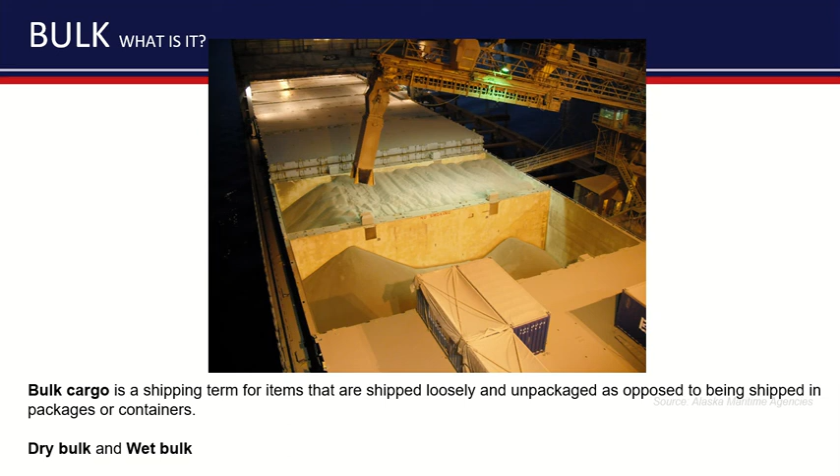So we distinguish a couple of sizes and dimensions and deadweights among the types of bulk carriers which are sailing around the world. What is important to remember, you don't need to know all these types by heart, but from the type name you can a little bit distinguish the route or the destination of a vessel.

For example, Panamax or Suezmax, the ship is built to take a maximum amount of cargo through that canal. So it's a little bit seeking the limits to pass there, and the dimensions are maximized to the restrictions of the canals. If you can't go through the Suez Canal or the Panama Canal, you are a Capesize bulk carrier. You are a bit bigger. You need to have a longer sea voyage to reach your destination.

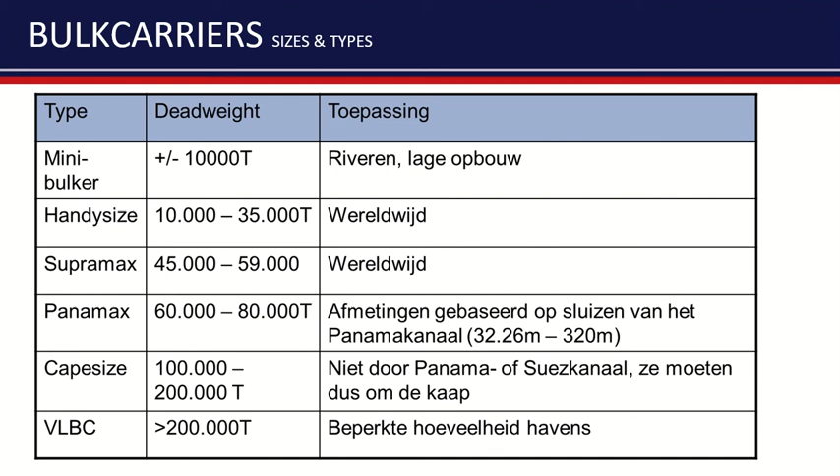What we've seen the last couple of decades is that the type name is also sometimes given the name of the port where the ship is sailing to. For example, China is taking a lot of iron ore from Brazil. They go often to a port called Tubarão, and the dimensions and the deadweight of the vessels are specially built for the port of Tubarão, and they call the type name Tubarão Max.

So the general arrangement of a bulk carrier, there are a couple of distinctions between ordinary multipurpose vessels and bulk carriers. First of all, usually there's no side tank, so here's the side shell directly. There's some frames over here to take the weight of the topside tanks, but there's no side tank.

What is noticeable is that there are hopper tanks and a topside tank, which is basically also a hopper tank. And the hopper tank is self-trimming, and with self-trimming we mean that particles can fall down in the direction of the center line, and this speeds up the discharge process.

Another remarkable thing to remember is bulk carriers are type A vessels, so the freeboard rules are a little bit less stringent compared to type B vessels, and the reason is the distance between the hatch coaming and the side shell. There's quite some distance to bridge over here, so the hatch coaming won't receive so much water from sea or green water. So they said bulk carriers can take a bit more. Freeboard rules, load line rules are a little bit less stringent. Next sheet.

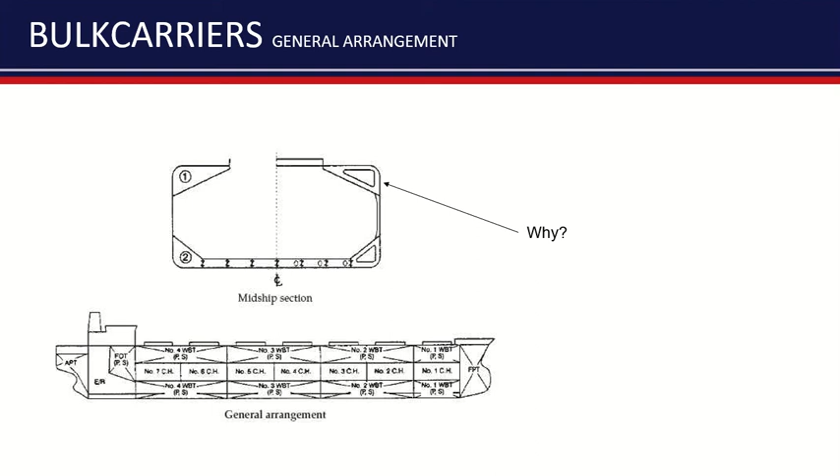Oh yeah, I forgot to mention, bulk carriers, if they do a ballast voyage, to improve the behavior of the ship, the rolling period in particular, they can ballast the topside tanks, the high hopper tanks, and they improve the vertical center of gravity. They bring it a little bit more up, and in that way the rolling period is improved. It's a little bit longer, and that's better for the crew to sleep and to rest, and it's also better for the steel work of the ship, welding connections, etc.

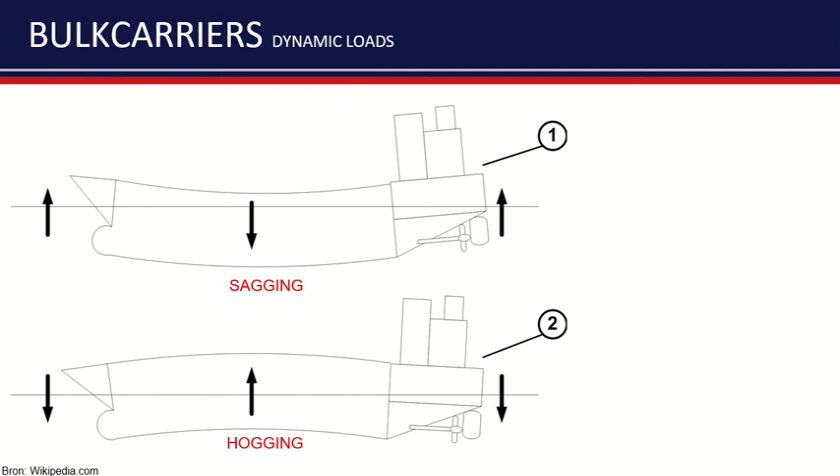So something to remember, we have dynamic loads working on a ship depending on the wave crest or the wave trough. Where is buoyancy, yes or no? It depends whether the ship is sagging or in a hogging condition. The sagging and the hogging condition especially has an impact on the sheer strake and the bilge strake at the bottom. There's more tension when the ship is sagging or hogging. If you don't remember sheer strake or bilge strake, please have a glimpse at your ship's knowledge book.

What is also important is torsion on bulk carriers, because they are so wide. The beam is big. In absolute sense, there's a lot of deflection of the hatch coaming, and hatch coaming deflection is a risk because it might cause the hatch covers to get lifted, and basically there is space between the hatch coaming and the hatch cover. It basically means that the cargo hold is open to water, and that's quite a big risk for vessels like this. So we need to keep the torsion within limits.

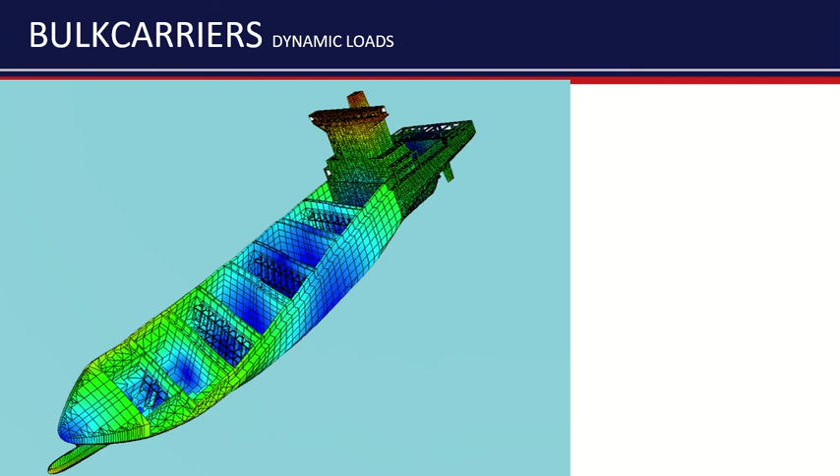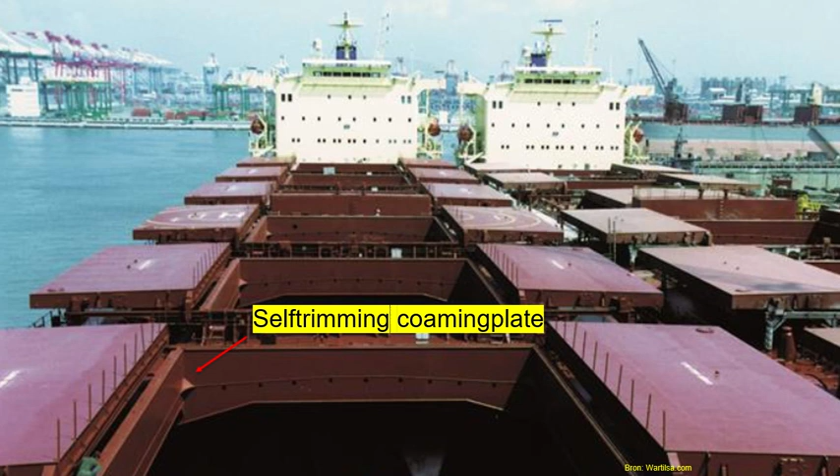Distortion of the shape of the hatch coaming. Is it still watertight? Yes or no? That's something to remember. And what they do, they put a lot of extra stiffening in the hatch coaming. An example of one of the stiffenings is this self-trimming coaming plate. They are in all four corners, and this minimizes the hatch coaming deflection. It's a triangular plate, driehoekig in Dutch, over here.

If we're going to make the ship cargo worthy and seaworthy, we need to read in the books. The Bible for bulk cargoes is the IMSBC code, the International Maritime Solid Bulk Cargo Code. Cargo information is stated from A till Z. It's based on the proper shipping name of the good itself, alphabetically, and what is important to read is certain categories and risks.

This code distinguishes between three groups. Some cargoes are in more than one group. Group A, cargo which can liquefy. Group B, cargo which can cause a chemical reaction. And Group C, non-class A or B cargo, but with another stringent risk. We're going to speak about some of those risks in the next sheets.

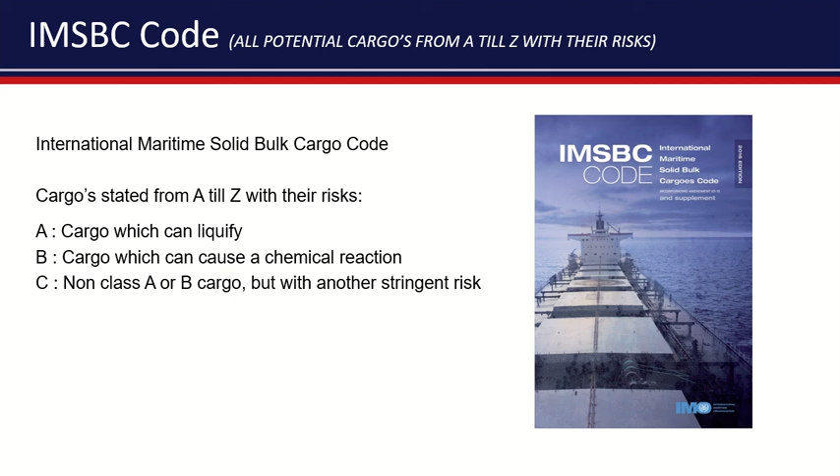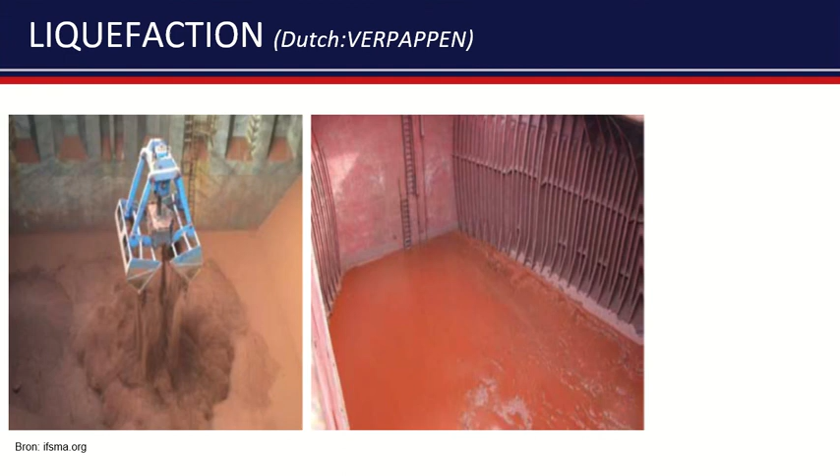Liquefaction is an important one. I'm a bit too quick. So what you see is water or moisture on the top surface of the cargo. I will show you the definition a little bit later on. If there's a lot of water on the top side in the cargo hold, it's very likely that the ship will lose stability. We're going to speak about that a little bit later on during this year, hopefully in the same block as this one.

So what is liquefaction? Cargo gets liquid during the sea voyage due to pressure, ship's motion, and vibration when the cargo reaches the flow moisture point. What is important to remember is that most likely, if this happens, the cargo was loaded earlier on and it was too wet to safely load. So the cargo is inside the hold. We're going to unmoor and make the sea voyage. Due to the movement of the ship and pressure and rolling and pitching, etc., the water out of the cargo slowly comes up. And I will show you shortly in a movie how it really works.

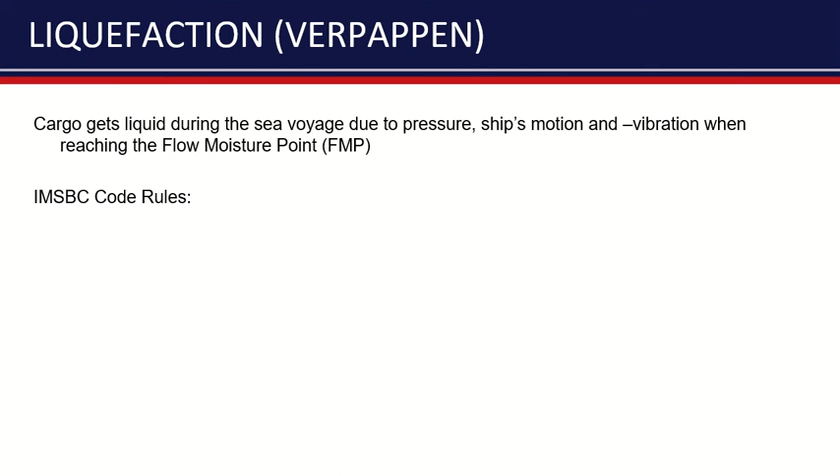But in the IMSBC code, there are some rules. The moisture content, if shipped overseas, must not exceed the transportable moisture limit. And inside the code, they built in a certain margin. The transportable moisture limit is always less than the flow moisture point, and the law builds in a margin of 10%. This is the maximum limit, TML, below the FMP, where the water comes up and the cargo liquefies. No liquid cargo to be shipped in the same hold as the bulk cargo.

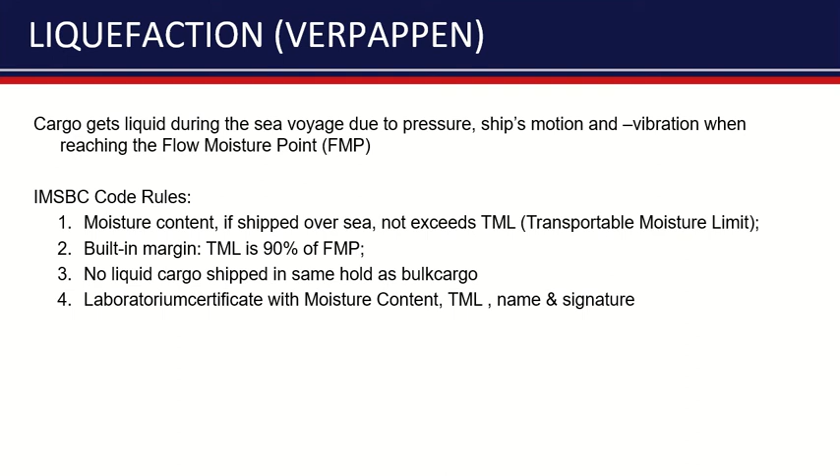We need a laboratory certificate for a number of tests. There's one test you can do yourself on board the ship; it's not very precise, but it gives a rough indication. But samples of the cargo need to go to a laboratory, and they take the moisture content and see where the flow moisture point of that batch of cargo is. So they give a certificate of the cargo in that case.

In this case, it's nickel ore, and they took 2 samples, and the water content as a percentage of the TML is 84% and a bit. The built-in margin is 10%. So in this case, we can safely ship this batch of nickel ore. So the maximum you could reach here is 90%.

If we have more than 90, we are too close to the flow moisture point, so there's too much risk to ship that batch of nickel ore; there will be too much risk of liquefaction, so that the water comes up after vibration, and basically you have a lot of water able to move freely in your cargo hold, which is bad for your stability.

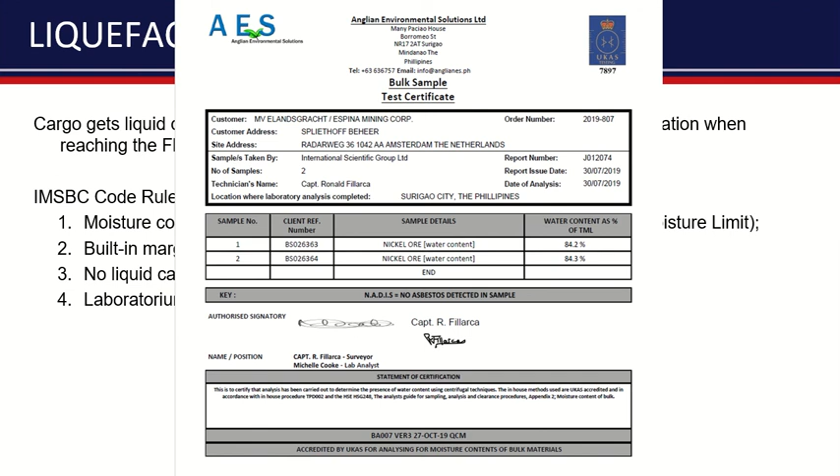So besides the laboratory test, where you can get an official certificate, we can do a quick test on board. We call it the can test. Please continue with movie 2A and 2B. Thanks.